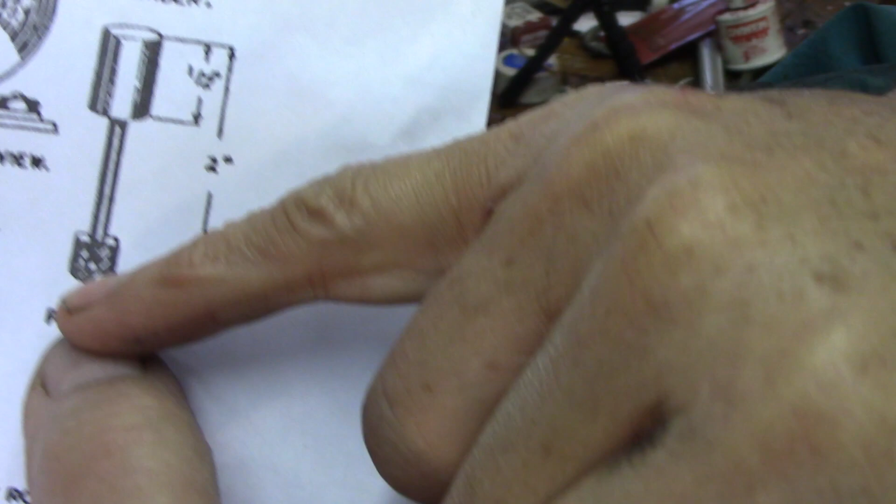On the 1/8 inch brass, I'm going to lay out the 3/8 inch connecting rod end. Here's the picture from the diagram that I blew up. You see it right here. It's not much to go by, but the piston's a 1/2 inch, so that's 3/8 I think. I don't know, 3/8 seemed like the right size.

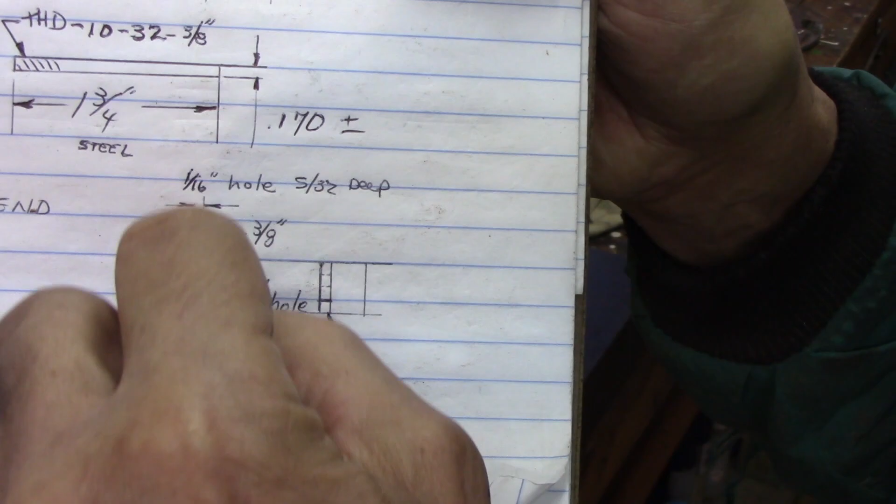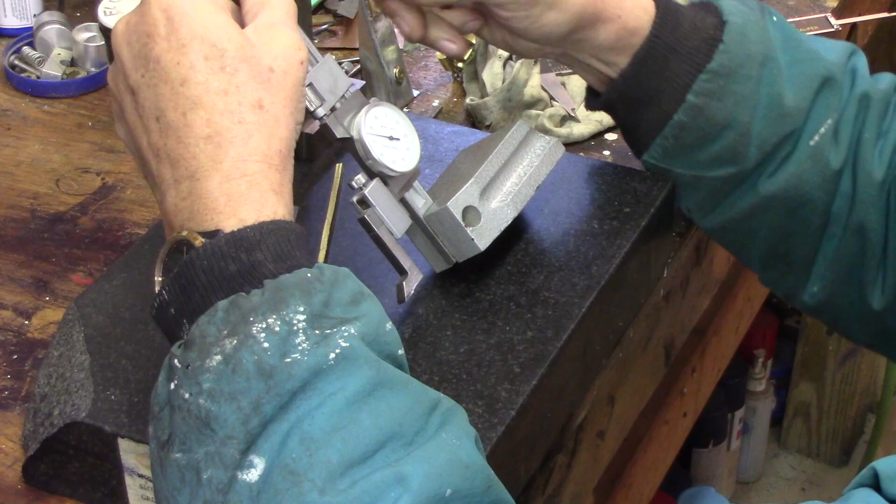I sketched out a diagram of it. It's going to have an 1/8 inch hole in the middle. It's 1/8 inch wide, 3/8 by 3/8, with a 1/16 hole in the top. I'm going to turn the end of the connecting rod down a 1/16 to just slide in there, and then I'll solder it. So I'll set this at 3/8. That's 375. Strike a line.

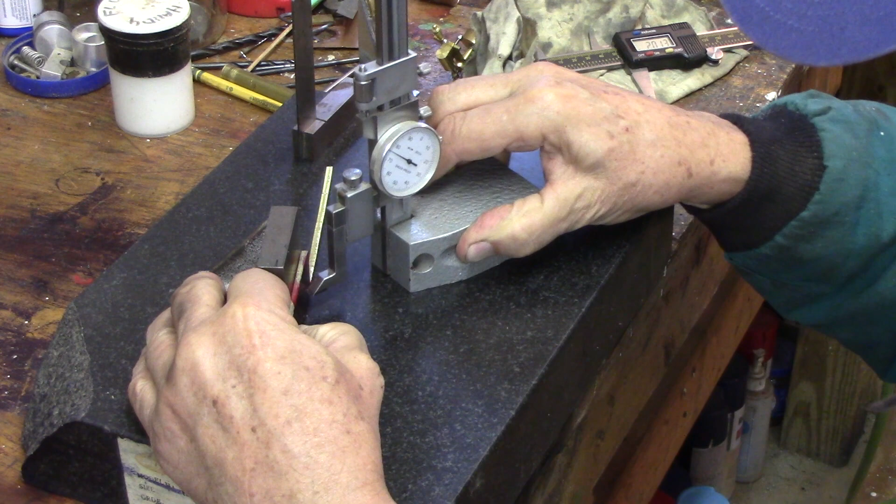Now when I cut this on the bandsaw, I'm going to save the line, so then I can file it right to the line. Alright, so now I've got 3/8 inch by 3/8 inch square. Now I've got to put the radius of the little bottom piece. This is for the connecting rod end. I've marked out 2 of these, and they have a little rounded bottom.

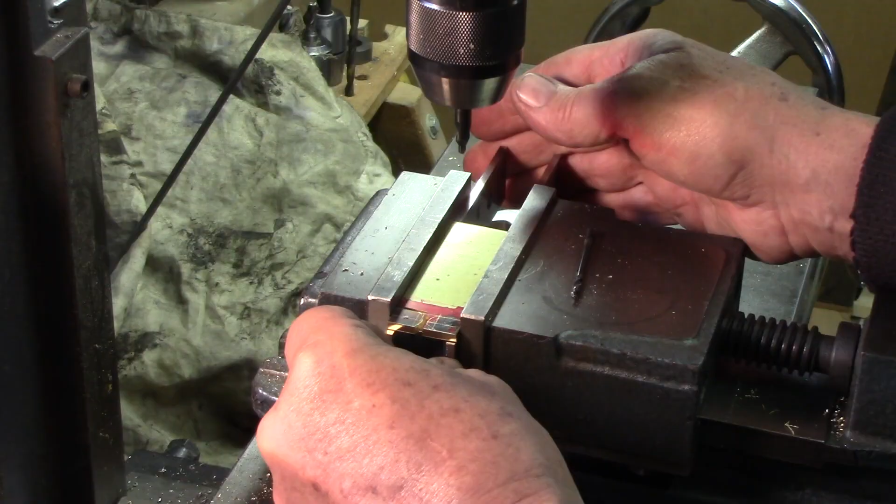Then they're going to have a 1/8 inch hole. I'm going to ream that hole. So right now I'm going to center drill, and then drill undersize, and then ream the hole for the crank pin. So the first thing, I've set this on parallels in the vise. Small center drill in the mill drill chuck. I use my mill a lot for a drill press because it's accurate. I put punch marks in there with a tiny punch.

And I haven't cut this off yet because this gives me something to grip. It's a tiny part, 3/8 by 3/8. Very hard to hold that with anything. So before I cut it off the material here, I'm going to do as many operations as I can while I can still hold on to a big chunk of it.

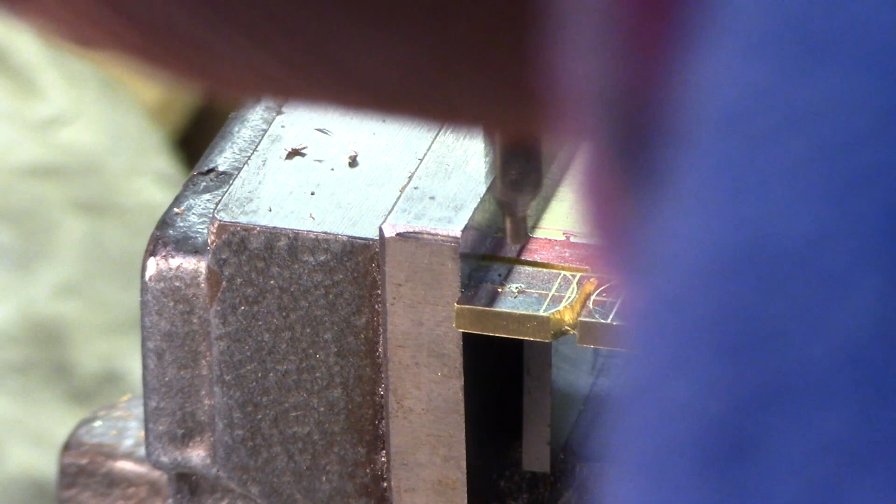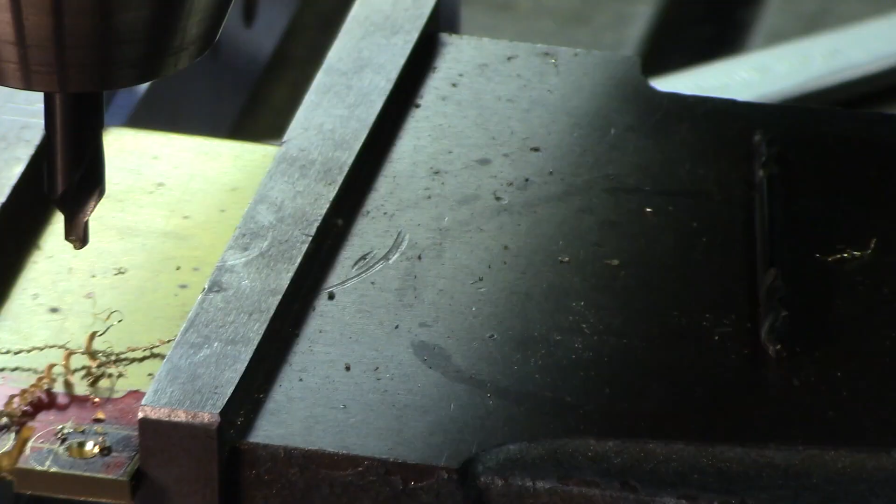But just tap it while it's running, see where it hits. And I'm going to look in there real close and see if it's right where I want it, and it is. Alright, that's just the center hole.

Okay, so now I've got a 1/8 inch is 125. So I'm going to drill 120 thou. Drill bits usually go over a little bit. And then I have a reamer. I have an 1/8 inch reamer. So after I drill it out close to 1/8, I'm going to ream it to exactly 1/8. You can get these reamers at 124, a thou under and a thou over.

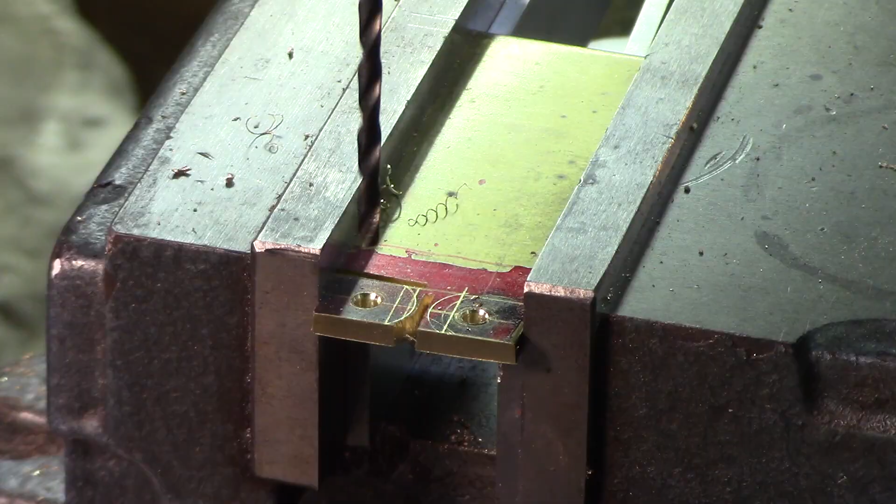If you're doing really precise work and you drill it exactly 1/8 and you have a 1/8 inch shaft, that's going to be a really tight fit if it moves at all. If you go a thou over, your part will fit. The shaft will fit in the hole. Reamer's a bit longer than an ordinary drill bit. Alright, reaming this out now, 1/8 inch.

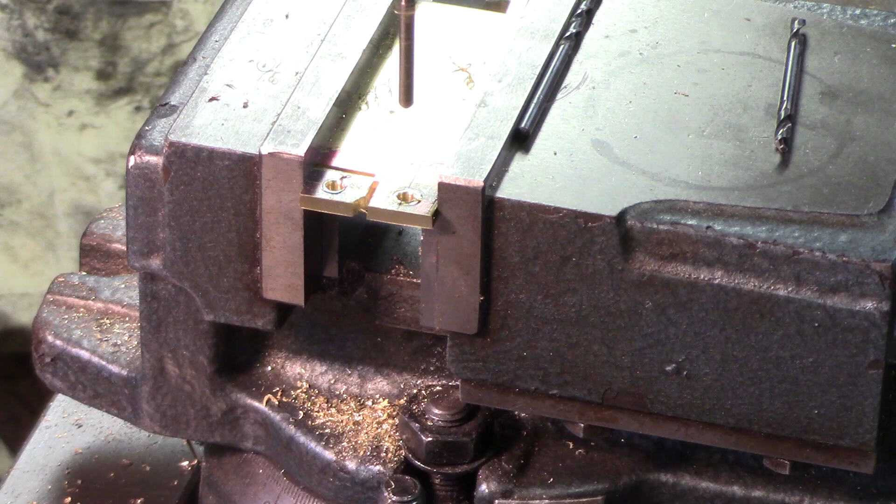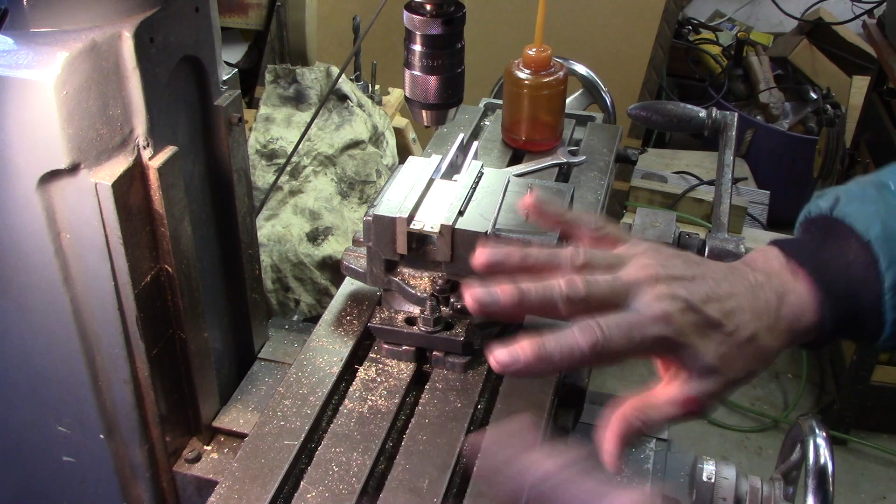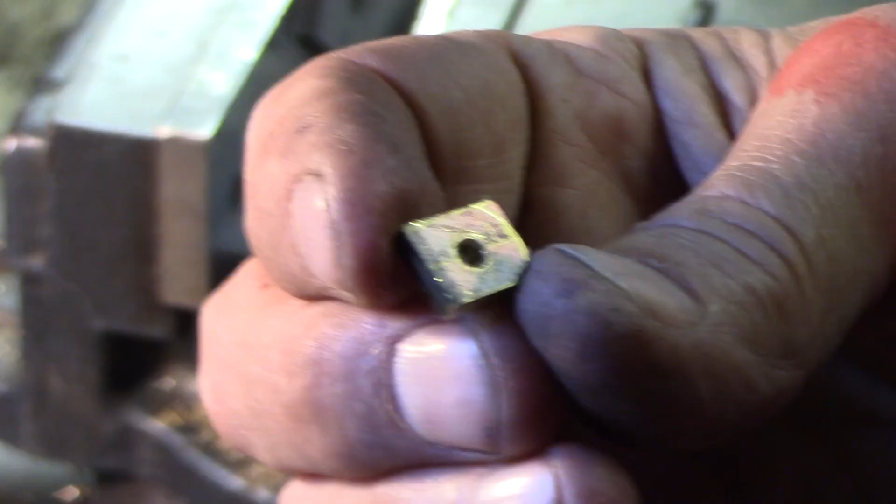That's it. That was easy. I should have about an 1/8 inch hole, and before I remove this, I'm going to check it. Yeah, that's beautiful. That's beautiful. I have to deburr these on the back and then cut these off. Okay, I have it cut off now.

I spent the last 15 minutes looking around in the swarf because I wasn't careful, and when this cut off it jumped and went down into the netherworld of the swarf. Luckily, I found it by the foot of the bandsaw, so that's kind of frustrating. All work stops when you lose your tiny part. Anyway, you can see the lines there, and I've got to bring it down.

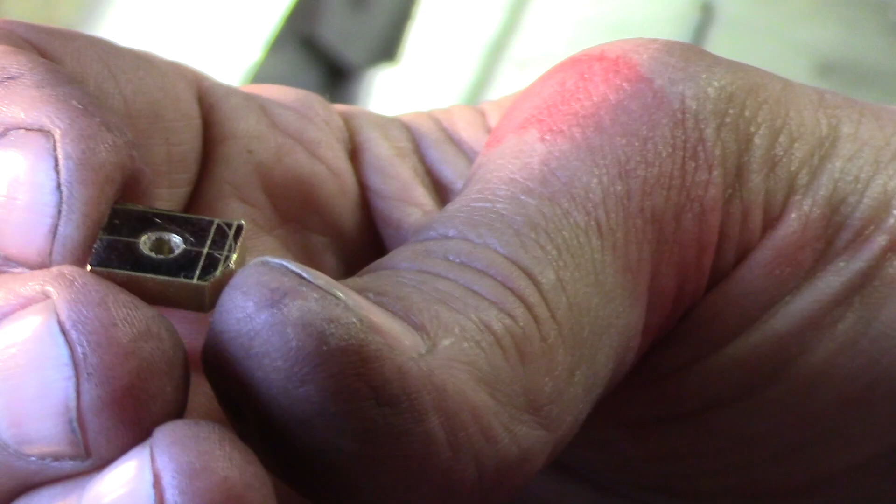Now, I'm going to use the belt sander, and it's going to get very hot because brass is a great conductor of heat. So what I'm going to do is I'm going to clamp this in the vice grips. Now, I have these vice grips that have smooth jaws, so they don't rip up the part. You know, the normal jaws of pliers or vice grips are serrated for grip. That will tear up your screw heads and your part. So, see those smooth jaws?

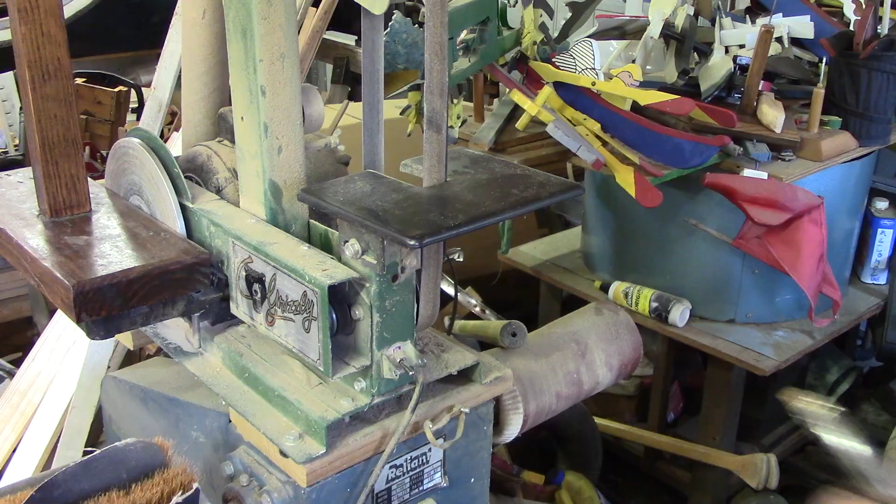So I'm going to hold it like that and bring it down to the line. That looks pretty good. You can see I just went right down to the line that I marked out on the surface plate.

Okay, I'm back over at the workbench now, and I've got some of the parts laid out for the two engines. What I'm working on now is the big end of the connecting rod. From this piece of 1/8 inch brass, I cut out this big end. Before I cut out the second one, I want to see how the first one turns out. It's looking pretty good. I just need to clean it up. So I have a nice little fine file here, and I think all my files are overdue for a serious cleanup. I'm just going to take the burrs off and clean it up.

Now, the next operation on this will be, I'm going to drill a 1/16 inch hole in the center, and then I will turn down the crankshaft itself, fit it in the 1/16 inch hole, and solder it in place. Again, I'm building this exactly as the picture in the drawing I have from Vic Smeed's book. See how it looks after we get it all set up on the engine and most of the burrs off.

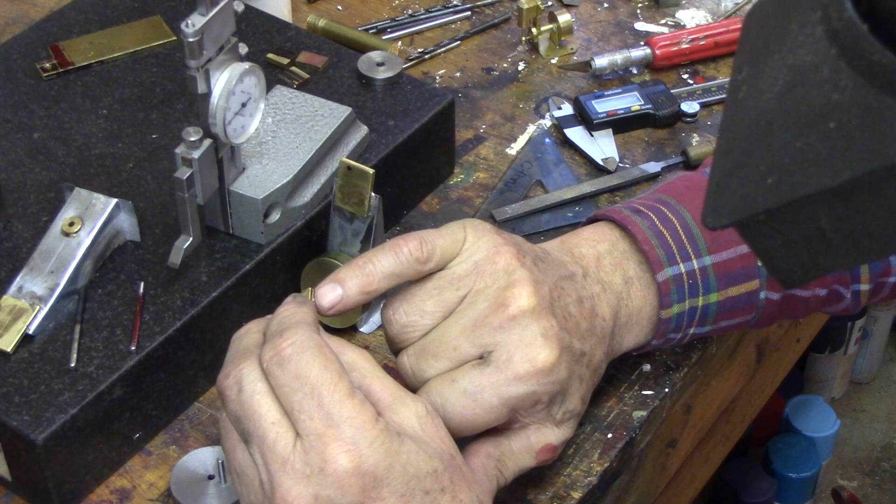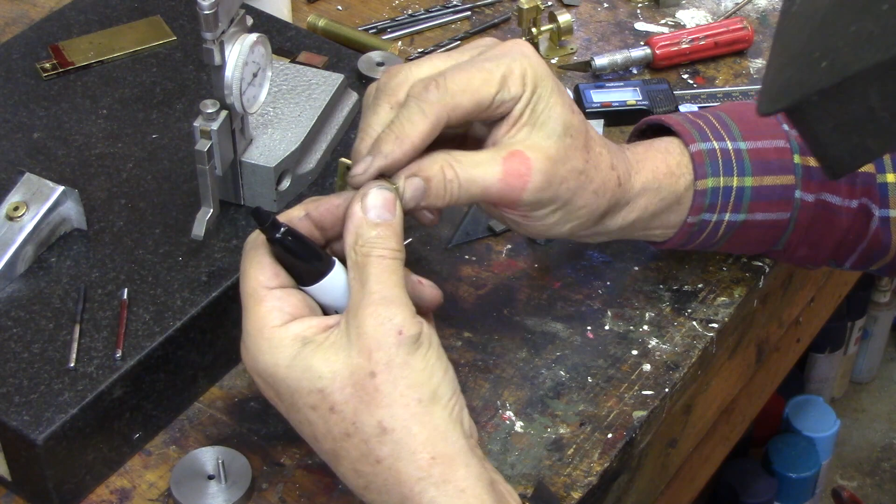So the next thing is to mark the center line. I'll do that with the height gauge here. Color it in first with the Sharpie. That way I don't have to wait as long for that red Dykem to dry and get it all over my hand. Alright, so I'll just lay it on here. I'll measure its actual width, divide that by 2. So half of 126 is 063.

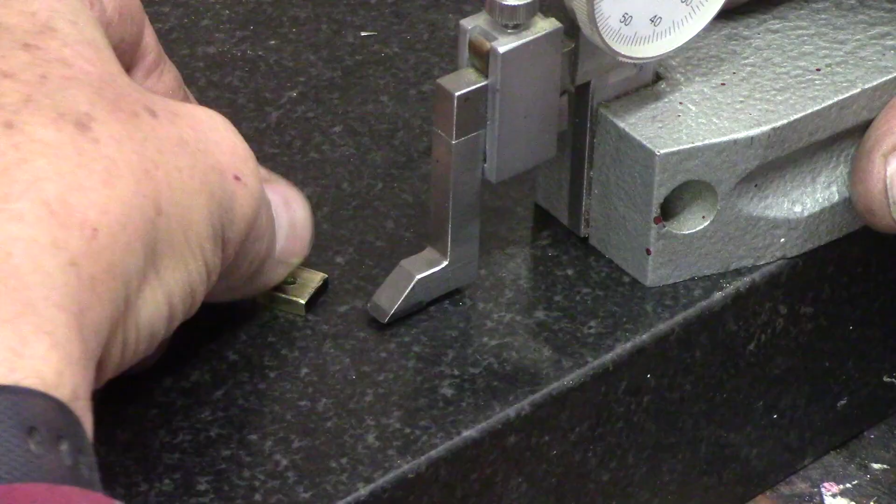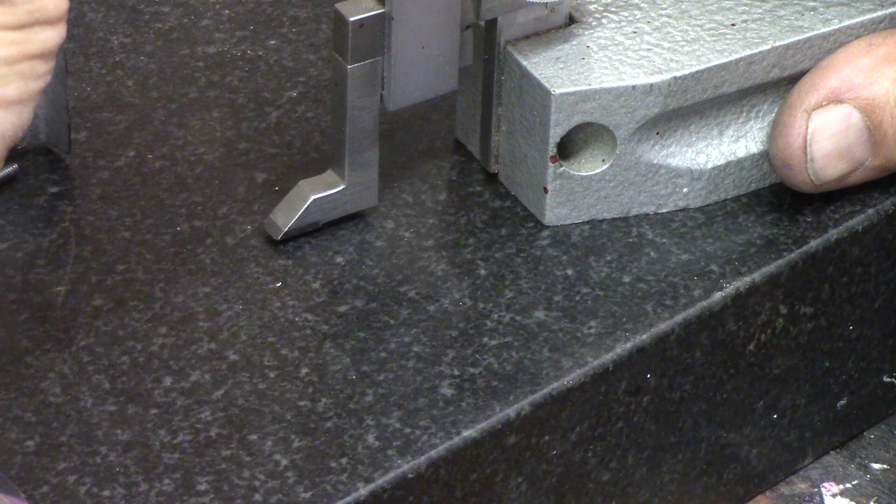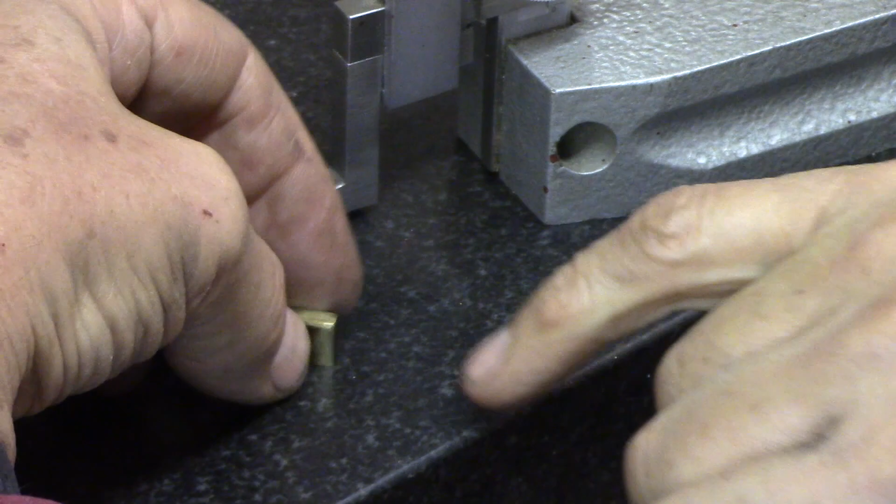Now, to check it, flip it over. Make another line. And if it wasn't in the center, you're going to get 2 lines. But then the center is in between those. When I flipped it, I got a thick line. Then I find the center this way, the 3/8 point, and mark it again. Half of 3/8, .187. Now I've got a nice little crossroads that my sensitive punch will find.

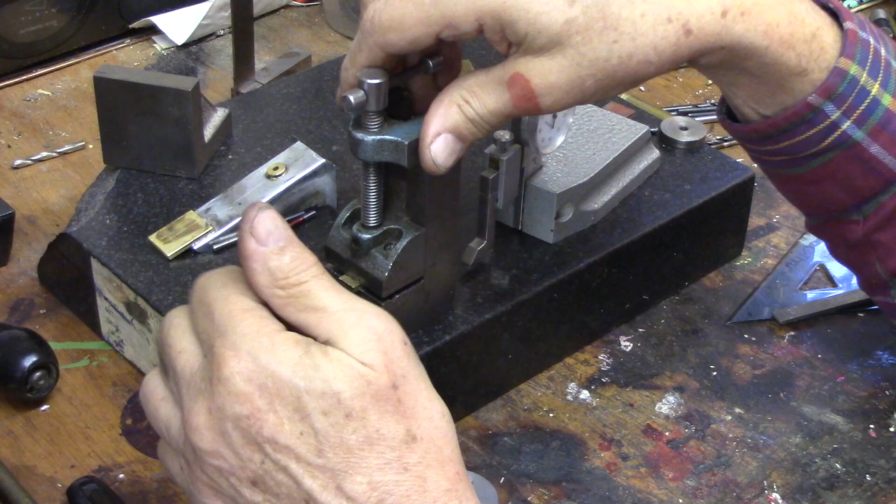I've got my little tiny Palmgren here. These things are great. The beautiful part about these little Palmgrens is you can lay it on its side, you can lay it up like this. It's 90 degrees. It's ground flat and 90 on each side. So, boy, if you're doing a part, you can lay it like that. You can lay it like this. So, I use it in my manual tap machine to hold parts. But right now, it's going to be great for this.

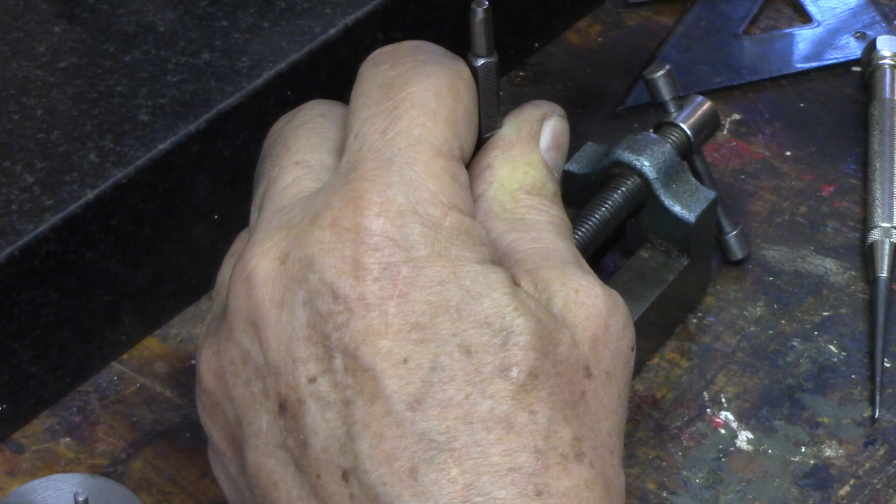So you follow along the line. Let the feel of your fingers and the tip of the point follow along that line. And when you hit the cross line, the center line, it'll just stop. You hardly even have to look, and you can do it very quickly, and it'll be dead on. Now I can go to a little bit larger punch. Still very small. Wham, this one pretty good because it's hardened. I don't know if you can see that. Man, that's dead on. That's finished.

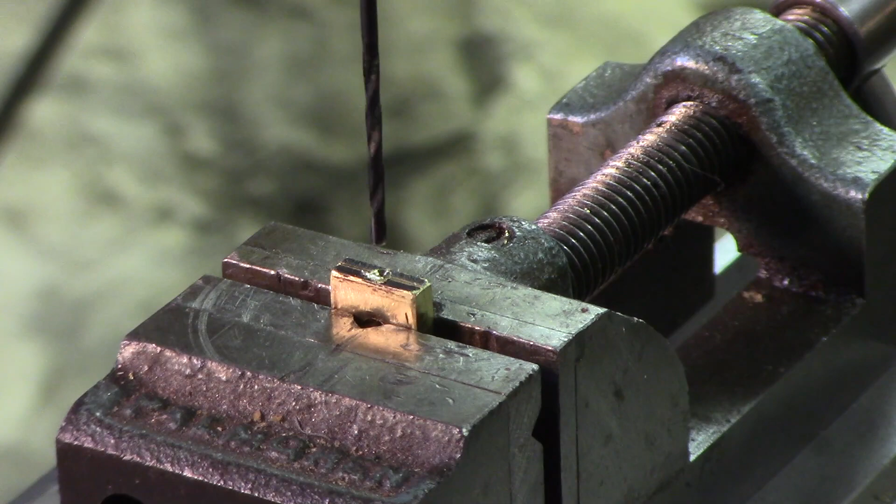So the next job on this is to drill it. When I get the hole drilled, I will machine the bottom of the crankshaft here to match the hole. Okay, I'm back over at the mill. Got the smallest center drill I have on hand at the moment. I wish I had my Sherline mill set up. This little part here, you could build this whole engine on a Sherline. And I'm going to drill that 16th. Okay, I've got the 16th inch drill bit. There we go. Nice. Notice I have the little Palmgren clamped in my vise. That's all right.

So I have a number 48 drill, 0.076. It's a little bigger. That's going to be easier to machine on the lathe, on the steel crankshaft. A 16th is really hard to get to without breaking it off or bending it. So I'm going to go with this number 48, .076 drill. I think it's better. And it would follow the hole anyway, but there we go. That's done. That'll just give me a little bit bigger shaft to put in there. And that looks pretty good. At least it's on the center this way and this way.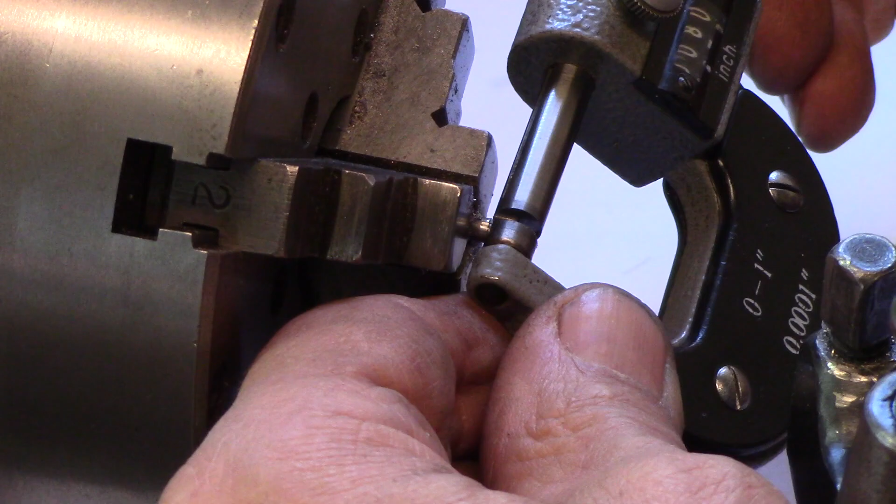Okay, I've got the connecting rod in the lathe. I had a little difficulty. The first one I tried grabbed the tool bit. This is the second one I tried. Same thing. So I'm like, I'm doing this wrong. I reground the tool bit. Very gingerly, I pushed it in as far as it would go. I think I've got it pretty close now, to be a tight slip fit. So I've got to take off a little. Let's get the mic on it. Let's see. Yeah, 80. So I got 4 thousandths to take off. I really want to leave maybe a half a thou in there because I want it to be a tight fit. Might do that with a file.

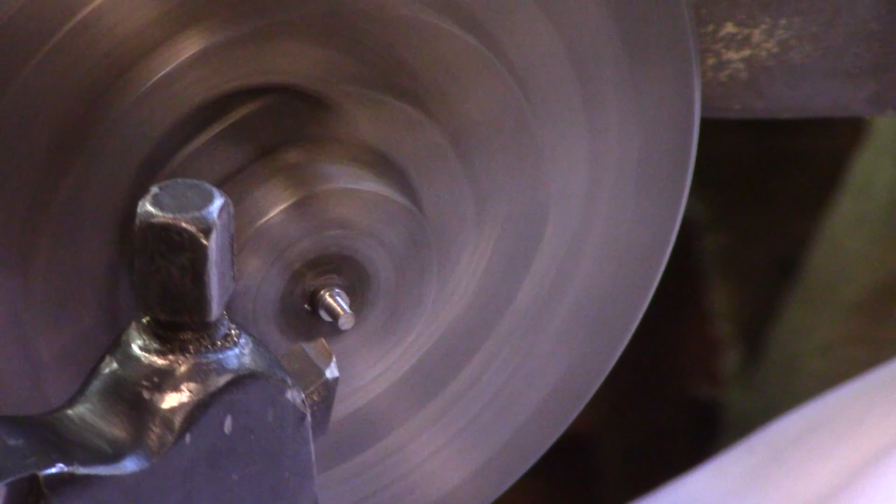That may be cutting or maybe not. I don't think so. We are very close. I think I got it that time. I think I got it. Felt it. Hope I didn't go too far. Alright, that's close. I'm going to take it the rest of the way with a file, and I don't want to go too far. I'm going to use the square one, or the triangle.

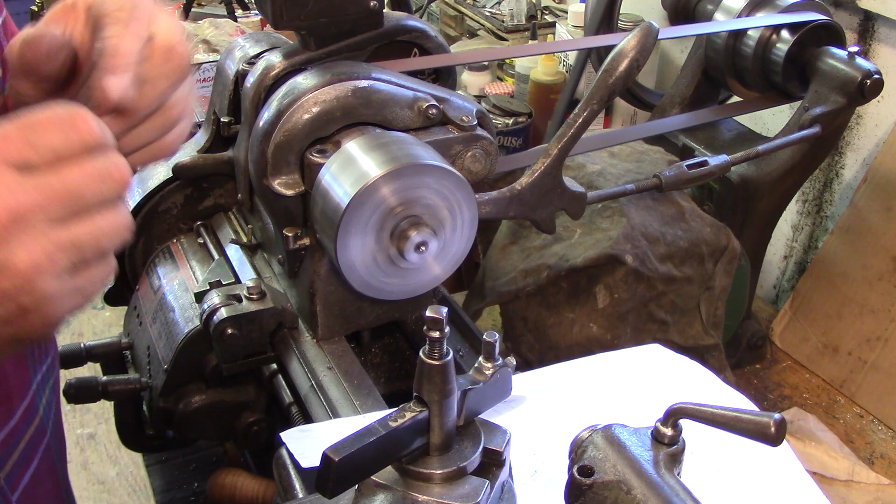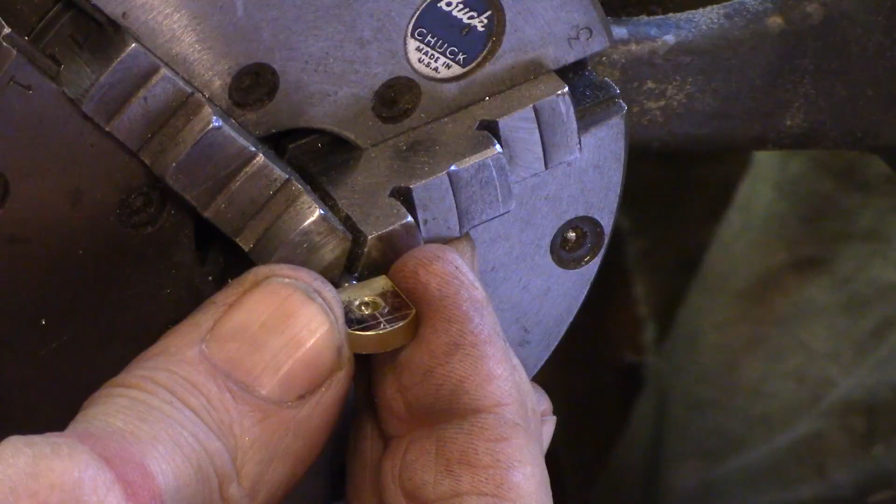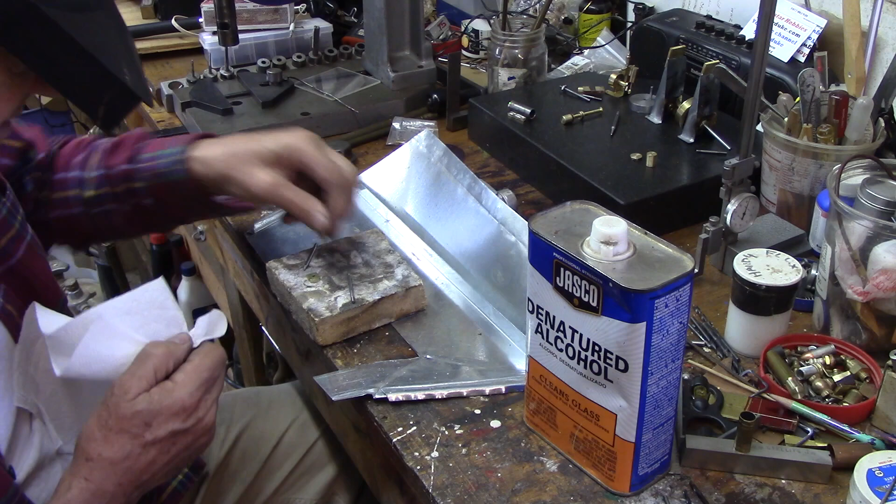That's a good fit. Connecting rod. That came out pretty good. I'm happy with that. That'll solder real nice. This is the connecting rod and the rod big end. You saw me making those, and I'm cleaning them with denatured alcohol. So I got these pretty clean with the alcohol. When you're soldering, you really want your metal to be as clean as possible. Let's turn that off. As clean as possible.

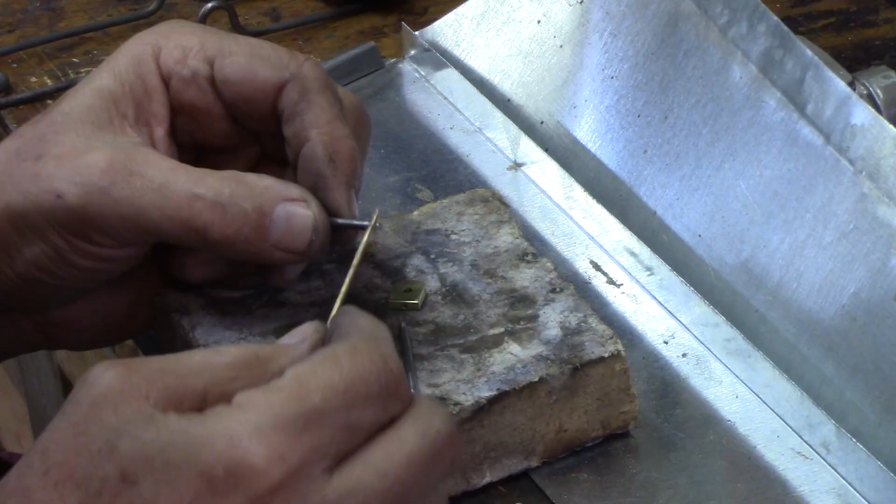Got some flux here. It seems to be working okay. This is paste flux, general purpose soldering, and I got a toothpick. I mean, you don't need much. I probably have too much on there already. So I'm putting the flux on, putting the rod in there with the flux on it and smearing it around. So wherever you don't want soldered, don't put flux. There's one and there's two. Alright, so they're cleaned, fluxed, and next is the solder. And I'm going to use this really thin solder. It's super thin, so you just don't use too much.

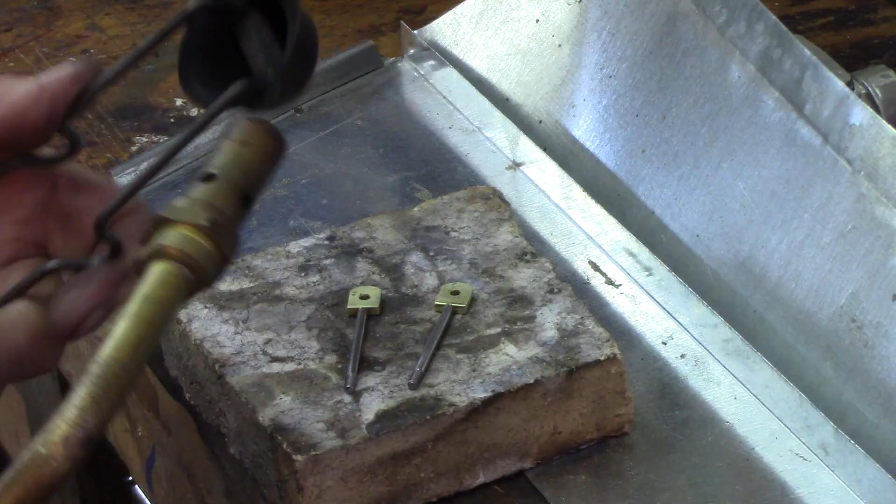Ignition. I'm watching that solder. You can see it start to boil. That's when you know you're getting probably too hot. I want to heat the steel and the brass at the same time. I want them to both get hot. That's hot. So you can see it's already gone. It's flowed right in there, just like it's supposed to. I probably ought to just leave that alone. Yeah, should have left it alone. I made a mess.

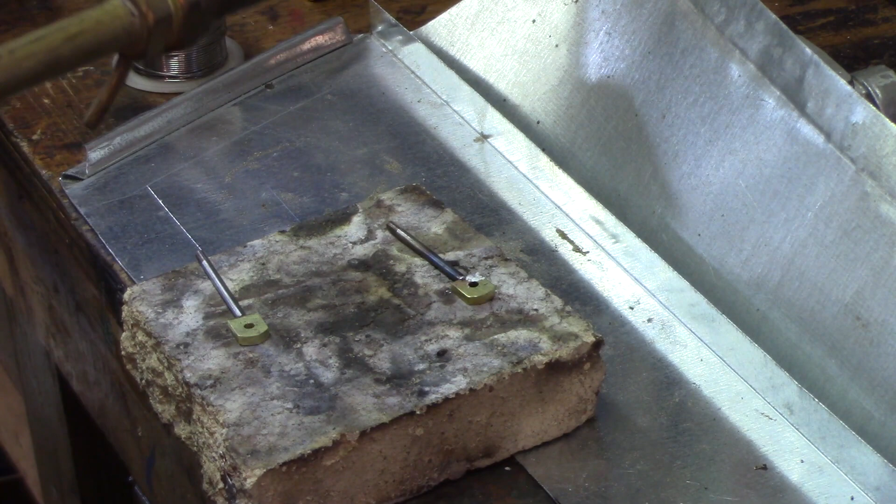While it's cooling, turn the brick around. Start on this one. I'm looking at the solder, the flux, and it's turning liquid. Let's give it a try. Yeah, that looks good. This one I'm not going to flip over. It looked like it flowed. So if it's going to work, it works really quick. Those are done. I'm just going to let them cool and go back to the piston.